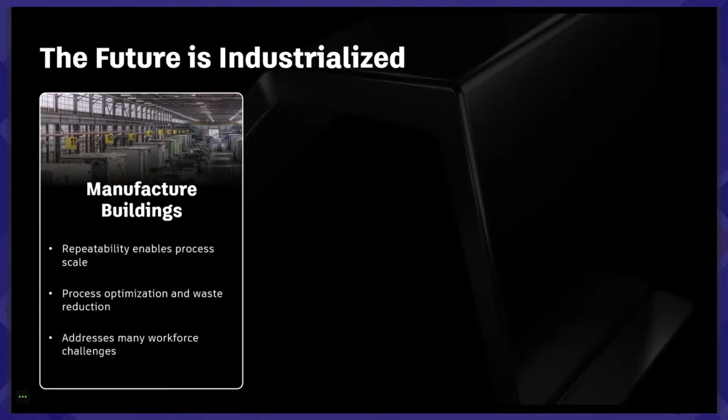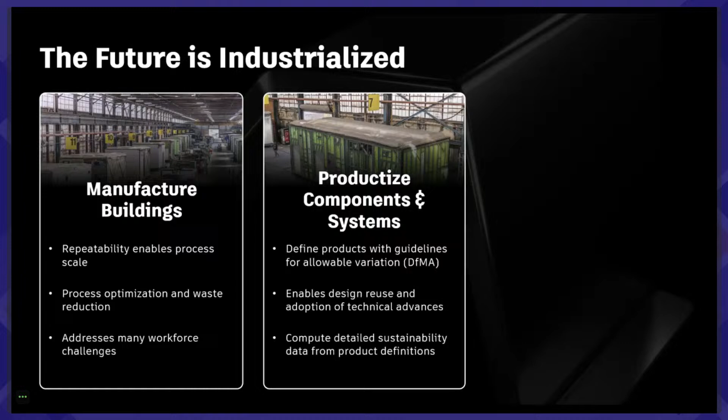Secondly, we can productize components and systems by defining products with guidelines, allowable variations and concepts known as Design for Manufacturing and Assembly, DFMA. We enable design reuse and the adoption of technical advances. And lastly, designing with products can reduce the overall project risk. We can use customizable building products and systems to cater to diverse needs. This approach facilitates data-driven design using accurate data computed from components, ensuring we make informed decisions every step of the way.

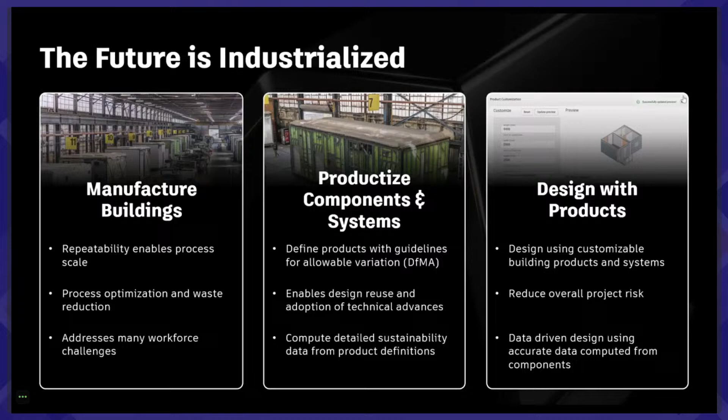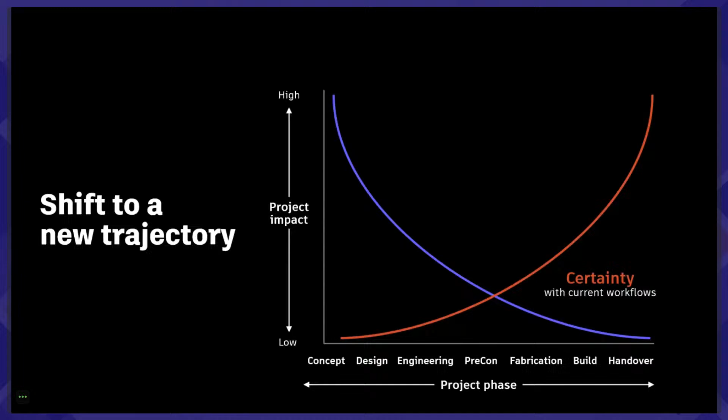Now, if we take a look at the red curve, this represents the challenges with traditional design and building methods. The certainty during design phases is low because the project starts with a blank slate. Designers typically use placeholder content, and much of the engineering detailing happens later on, when a project is already committed and changes can be costly and even unfeasible. However, this does not have to be the way.

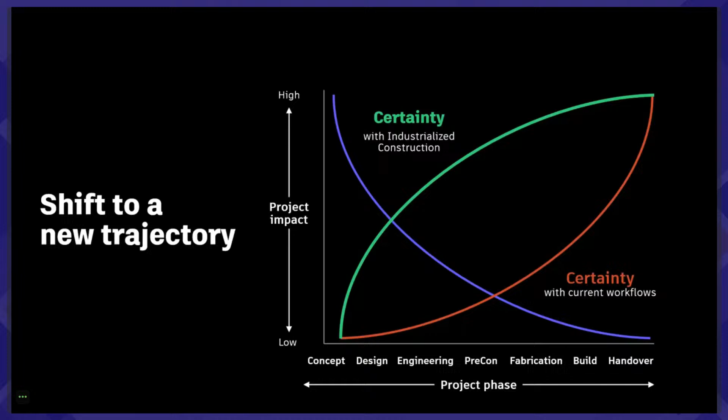If we take a look at the green curve, we can see the potential of industrialized construction. By starting projects with known suppliers and manufacturable components and the building elements, we can dramatically increase the certainty during the design phase. This productization allows architects to make validated choices during the design phase. As a downstream effect, it eliminates the manual and time-consuming processes for engineering, analysis and detailing.

So let's dig into the concept of productization a little bit more. One of the significant challenges architects or designers face in building design: imagine being an architect, crafting a beautiful, functional design for a building. One of the foremost concerns during this process is ensuring that the design choice made is manufacturable. It's crucial to know as early as possible whether particular design elements can be practically built or not.

However, the current solutions in the industry often fail to provide this crucial feedback in a timely manner. This delay and uncertainty can lead to costly redesigns and project delays, impacting the overall efficiency and success of construction projects. This shift in perspective enables us to look at construction from a productization standpoint, which occurs outside the normal plan, design, build and operate process.

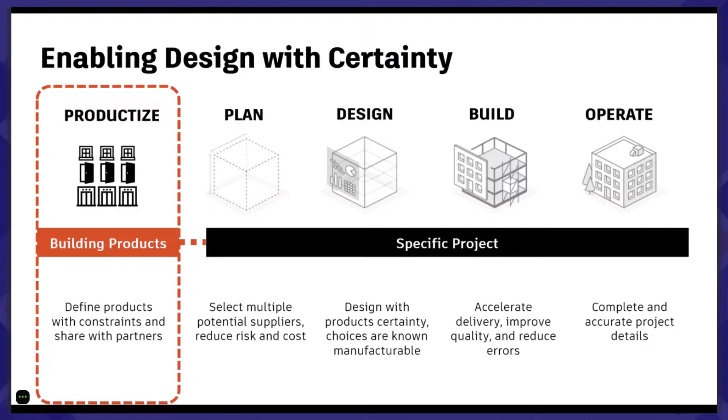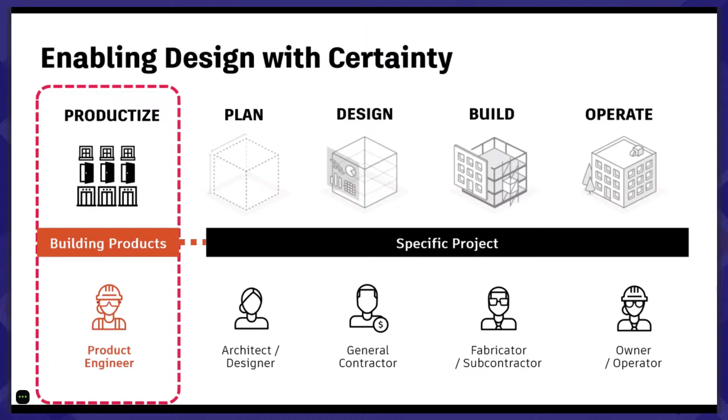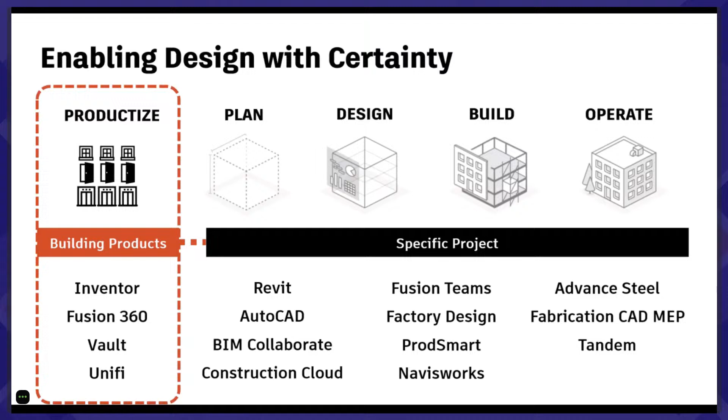This approach allows for a definition, design and reuse of products and assemblies within their constraints across various projects. This not only streamlines our work, but also enhances efficiency. Productization sees the emergence of the product engineer persona in the AEC space, the person responsible for the definition of products, assemblies and building systems. And through productization, we see the ecosystem exposed to a broader range of Autodesk technologies to enable the AEC and manufacturing converged workflows.

Let me introduce you to Autodesk Informed Design. We can begin the design process with components provided by suppliers. These are not generic placeholders, but real customizable components that are part of a product family, designed and optimized in tools like Autodesk Inventor. Instead of starting from scratch, architects or design professionals can integrate these predefined systems of components directly into their Revit design models. This approach fundamentally changes design processes.

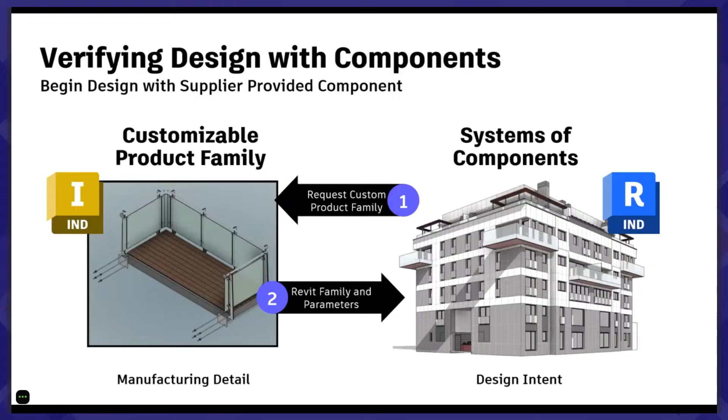Let me tell you a little bit more about our connected workflow. We are publishing with rules, customizing based on those rules and generating documents at scale. So the product engineer can input the specific rules, set all those properties required for the designer, but then also look at the level of detail for the model itself. The designer can customize and configure within the limits required, using the right level of detail, and also use the information provided within the component in their model.

And then finally, the product engineer can generate all the products at scale as required, such as bill of materials, drawings, and neutral 3D formats where required. And this information then can be published back into the ACC docs environment for all people to access.

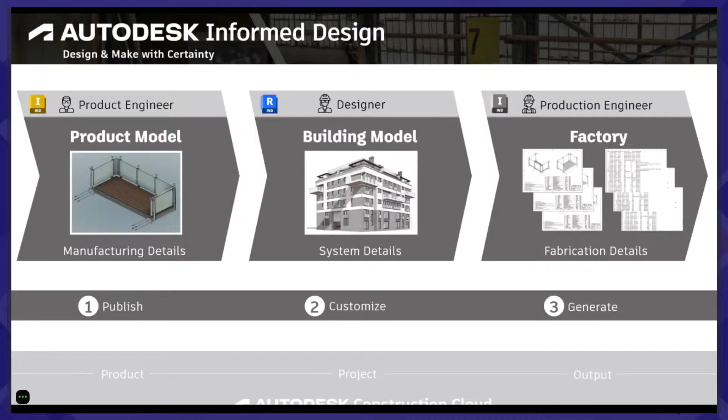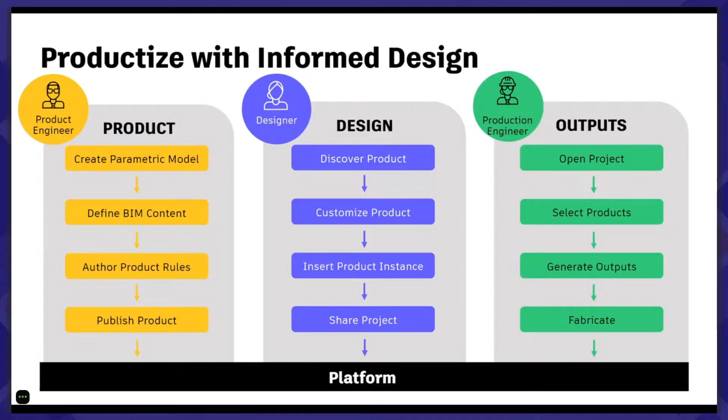So before we get started, I just want to help you better understand the personas we are using during this demonstration. We have a product engineer who creates the product definition for a manufacturing purpose. Next, we have the designer, who is the persona who utilizes the product definition in their design models. And finally, we have the production engineer who discovers the design model to generate the required output for manufacturing or fabrication. So let's jump in to the product and have a look.

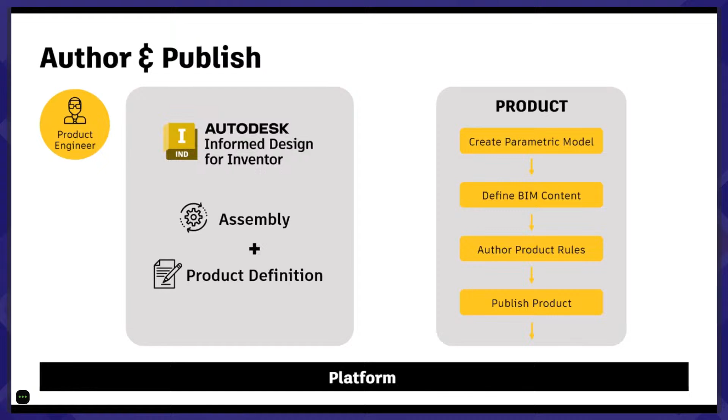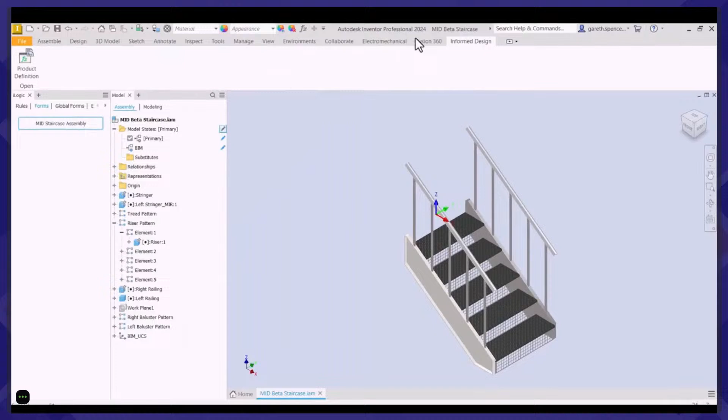So now let's turn our attention to the role of the product engineer and the powerful tool they have at their disposal inside Inventor. With the Informed Design for Inventor approach, manufacturers can utilize CAD tools to infuse their product models with detailed product specifications, rules, and constraints. It is a transformation step in evolving our designs to be more informed and accurate for practical, real-world application.

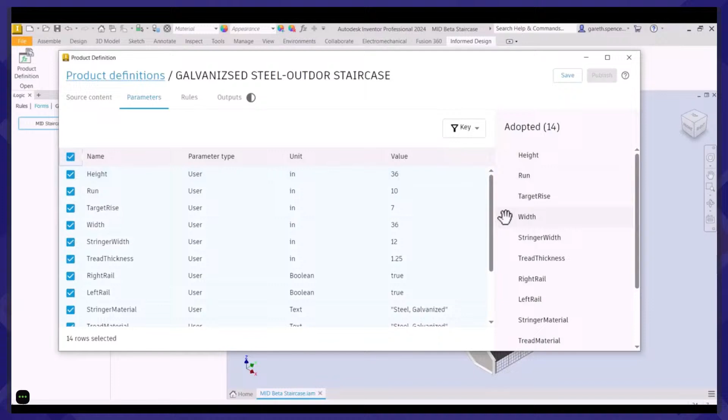Consider a product engineer working inside Inventor. They can create a parametric model that is adaptable and flexible. They can define the building information modeling content that encapsulates the product's physical and functional characteristics. They can author product rules that govern how the product behaves. They can also publish a comprehensive product definition.

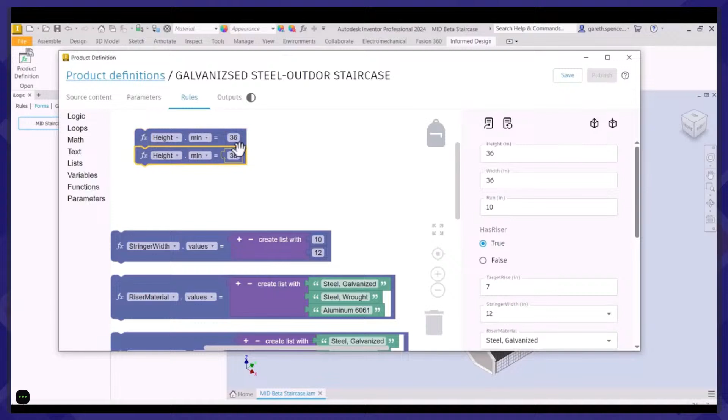But this capability extends far beyond creating a digital representation of a product. We're not just representing the product digitally, we're defining its behavior, its flexibility for customization, and limitations or constraints. This provides a detailed understanding of the product that goes beyond its physical appearance.

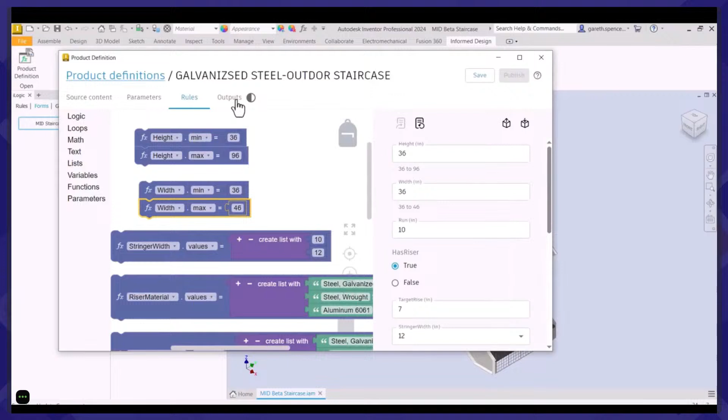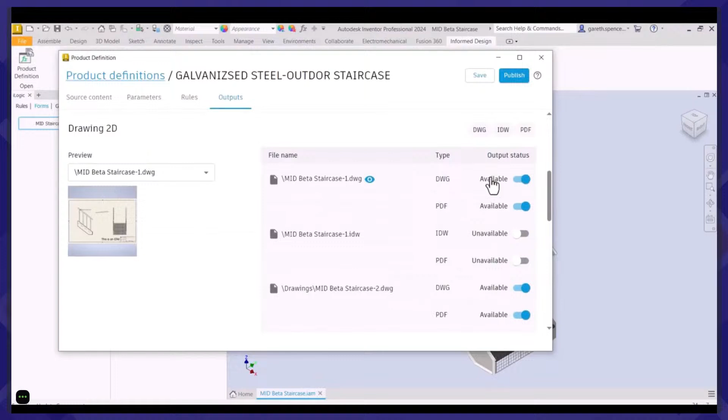This rich, detailed information is invaluable for designers. When the product engineer shares this information with the designers, they provide crucial insights about the products that are being incorporated into the designs. It's about mutual understanding and collaboration between design and manufacturing stages. This shared knowledge helps bridge the gap between design and manufacturing and encapsulates the architect's vision to achieve and align with manufacturing capabilities.

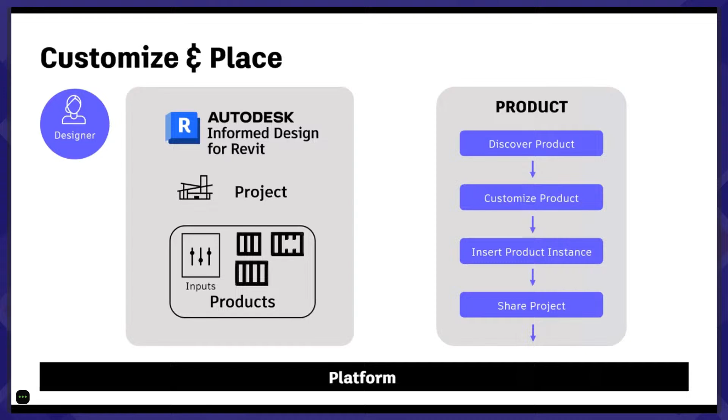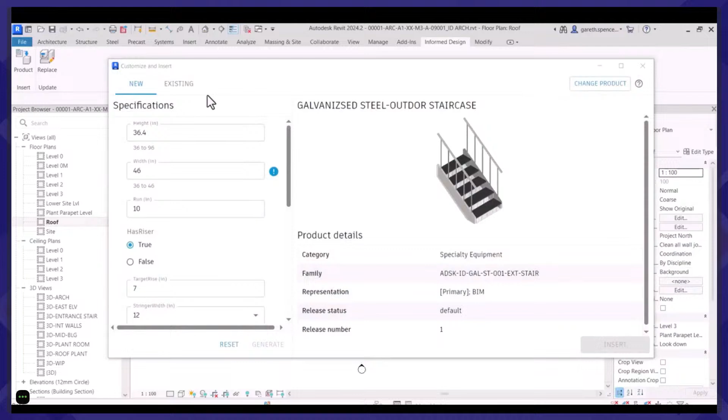Now let's look how designers can leverage the power of Informed Design for Revit to enhance their design process. Once the product engineer has created and published their product definitions using Inventor, these models become accessible to designers and become a valuable resource. Using Informed Design for Revit, designers can explore these product models and interact with them, customize them, and seamlessly integrate them directly into their building design. This starts with the discovery. Designers can search through the product models available, finding the right products that fit their design requirements.

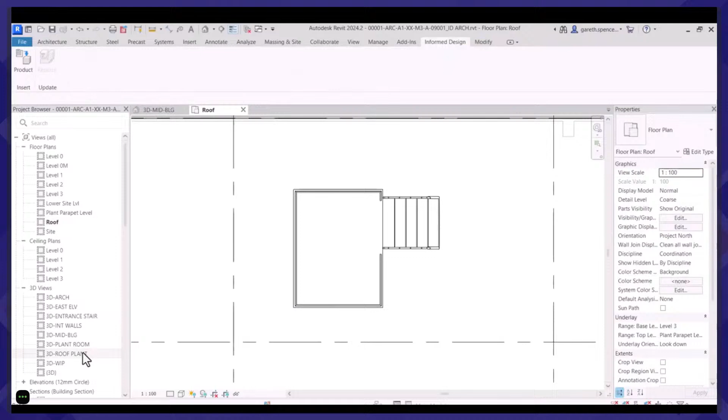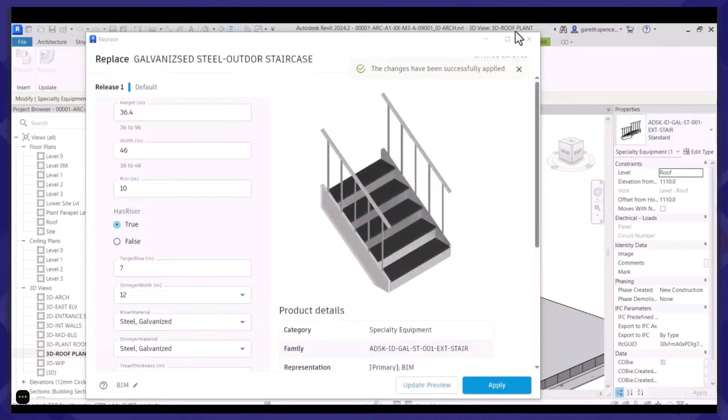Next comes customization. Designers can tweak these product models as needed, ensuring they align perfectly with their design vision. And finally, designers can insert the instances of the customized product directly into their building designs. It's a seamlessly efficient process that brings design and manufacturing closer than ever before. This approach offers a significant advantage, as designers are no longer inserting abstracts or working with hypotheticals. Instead, they're using known manufactured building components, transforming their designs from hypothetical concept to practical building designs.

And using Autodesk Docs, designers can share these product models with the entire project design team and, importantly, back to the product manufacturer. This shared access fosters collaboration, keeping all stakeholders informed, aligned, and working towards a common goal.

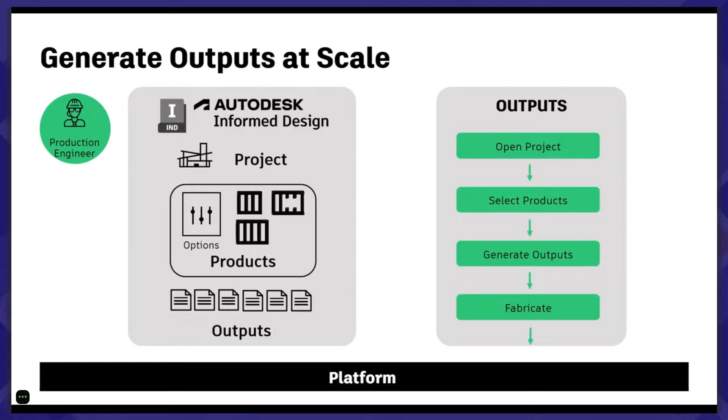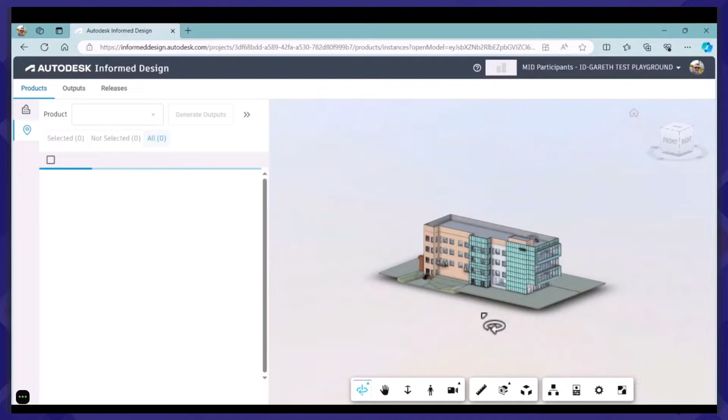Now let's look at the production engineer and how they can harness the power of Autodesk technology to automatically generate manufacturing documentation from design models. The Informed Design web application integrates seamlessly with Autodesk Docs. This integration allows us to access, manage, and share files with ease. This process, traditionally handled by the manufacturer, is now simplified and streamlined. This means that they can effortlessly output files such as bill of materials, drawings, and 3D models in various formats. The beauty of this is there's now no need to revert back into the Inventor models for use in production and manufacturing process.

The production engineer can select the required products to generate the specific outputs, which can be saved directly back into the Autodesk Docs project, ready to be viewed, downloaded, or shared with other parties involved in the project. The benefits of this approach are twofold. Firstly, it minimises the potential for errors by eliminating the need for redundant steps. And secondly, and significantly, it boosts productivity by facilitating a smooth, more efficient transition from design to production, allowing all stakeholders to design and make with certainty.

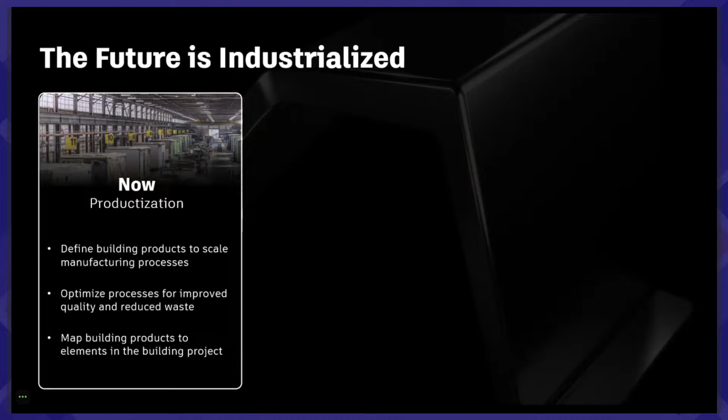Imagine a future where construction is not just about building, but about manufacturing. That's the future we envision at Autodesk. We are thrilled about the potential of industrialized construction. Let's start with where we are today. With Autodesk Informed Design, we're pioneering the concept of productization. As you've seen in our product demonstration, this approach demonstrates the way we plan, design and build. Moving forward, we're developing ways to help the industry design with guardrails. This means mapping the building products to elements of the building design to scale. It's about ensuring accuracy and certainty while giving designers the freedom to create.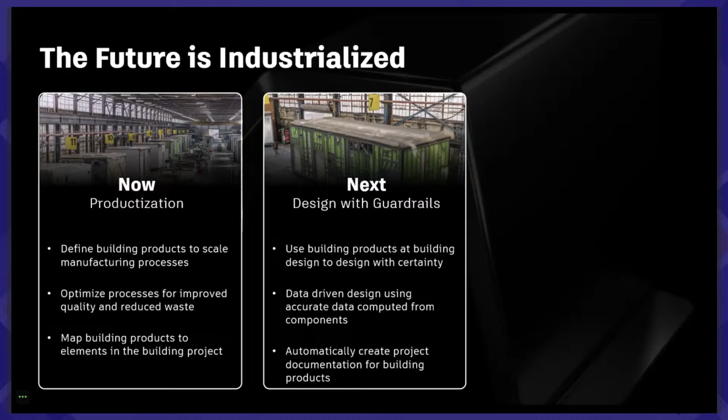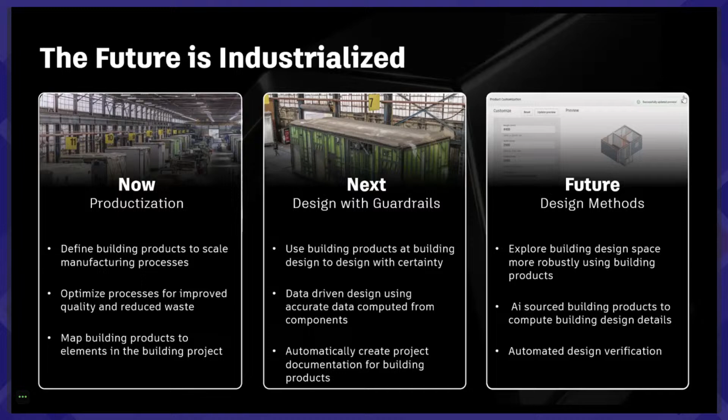Looking ahead, we see these developments as a stepping stone towards a future of generative AI-based design. We believe that this technology will be the foundation of construction in the future, enabling a level of precision, efficiency and certainty that we've never seen before.

Having just witnessed the power of our solution in the demonstration, let's delve deeper into what makes up our offering. Our solution isn't just a single tool, it's a trio of components designed to revolutionize your work processes. First up, we have an Inventor add-in which empowers you to author and publish building product templates with ease. Secondly, we have an add-in for Revit, which allows architects or design professionals to customize and place building products into your projects, transforming the way you design. And lastly, we have the web application that automatically creates the project outputs. This is where the magic really happens. And that's not all. Each of these components seamlessly integrates with Autodesk Docs, satisfying your storage needs.

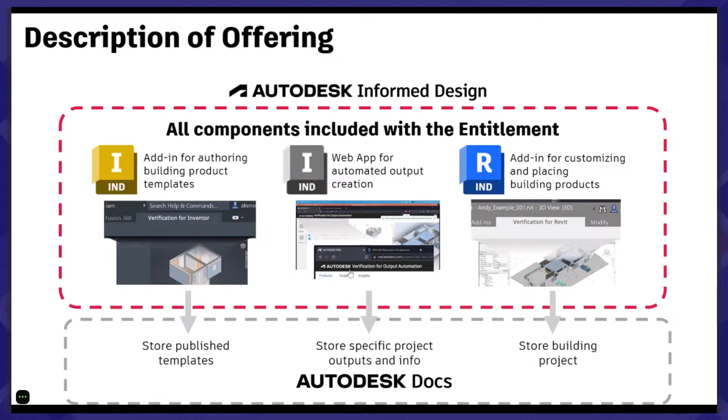A single entitlement unlocks all three components for both Inventor and the Product Design collection, as well as Revit and the AEC collection. When it comes to cost, we've structured our pricing reflectively, and to start off with, for the initial offering period, there's no charge to use the service.